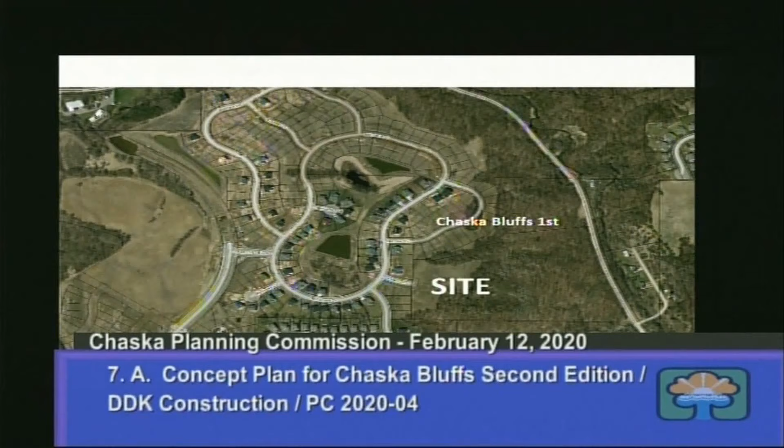So we have a concept plan application in front of you for Chaska Bluffs Second Edition that's located in Southwest Chaska. To give you an understanding of where the project site is located, I've included an aerial map exhibit here for reference. Again, it's in the Southwest Chaska area.

The main access into the site is going to be coming from our newest collector road in Southwest Chaska, known as Savannah Way. You'll take that northerly off of County Road 44, which is cut off on this aerial, up to basically the entrance of the Harvest development into the site. Deer Trail is a stub street right now, which provides access into the development we're looking at.

So to refresh your memory, DDK, who are the applicants and developer tonight, did their first edition just north of the site. They final platted that a couple years ago, and that was for detached villa lots off of Harrow Cove, which connects into the Harvest development as well. The southern site was basically put on hold until they could further evaluate stormwater needs out there.

So we are going through the start of our three-step process with the city, which starts with concept plan. This is the very first look at this addition and what's being proposed there. If all goes well tonight, they'll move on to their preliminary and final approvals.

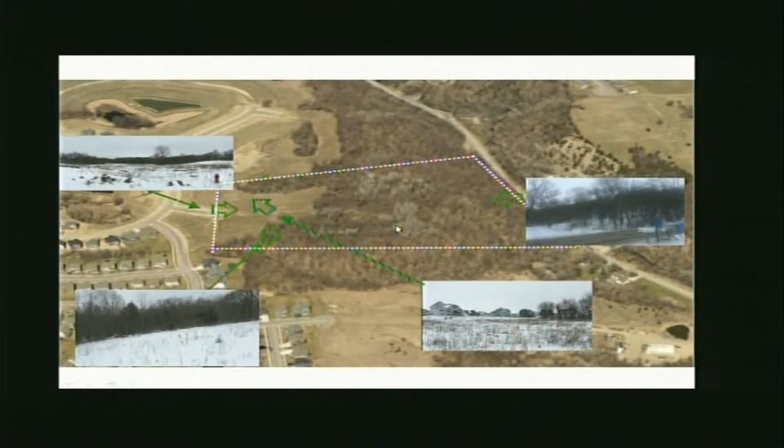So to give you a refresher on all the approvals that have subsequently taken place before where we're at now: it was in April of 2016 that the concept plan came in for a portion of the Harvest development, which also included the first edition of Chaska Bluffs off of Harrow Cove.

After that, it was evaluated that the area off of Deer Trail would be put on hold for concept plan approval until the stormwater work was further analyzed. Subsequent to that, in December of 2017, the preliminary plat and rezoning for Chaska Bluffs first was approved, and then in March of 2018, the final plat for Chaska Bluffs was approved. So they're currently building and constructing those detached villas out there right now on Harrow Cove.

So again, we're looking at a concept plan request tonight from DDK Construction to propose 17 single-family lots off of Deer Trail. The 17 lots extend off of Deer Trail, which stubs off today where you see on this aerial exhibit here. That will provide access to the 17 lots via a cul-de-sac.

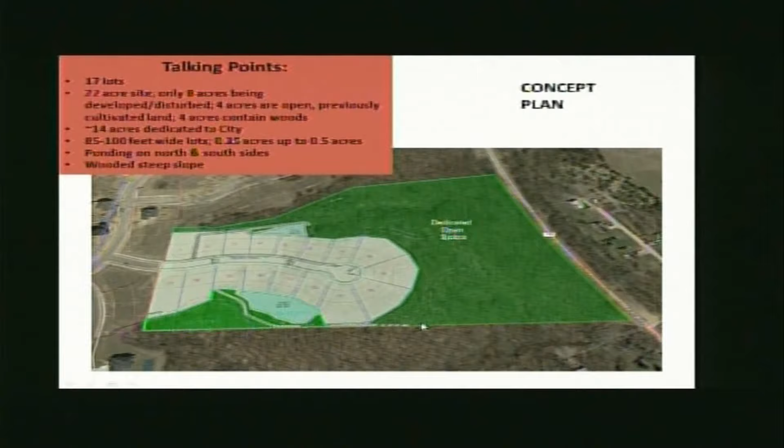So the plan that they landed on tonight was one of a few different iterations they've explored for the site. Back when they were originally looking at the site, they explored a 24-lot layout with 2 cul-de-sacs that extended much more into the wooded area and bluff area.

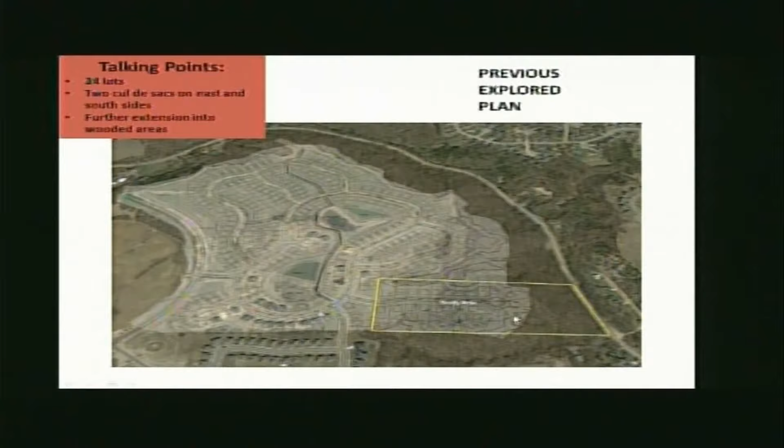In comparison, they landed on a more modest plan with only 17 lots. This exhibit shows the disturbance differences between the original plan and the one they're proposing tonight. They decided to go with the more modest plan so they could preserve more trees along the eastern and southern areas of the site, as well as provide adequate utilities for the lots being proposed.

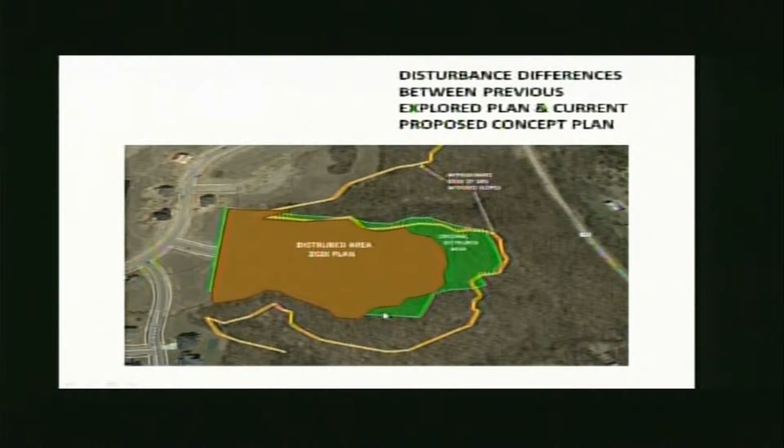Here's another iteration of the concept plan, a little bit simpler approach. The total distance of the road being provided into the site is 665 feet long. They will be proposing sidewalks on both sides of the street, which is standard for development.

One item of note that we provided in the report is where they are providing pond access to both stormwater ponds. We asked that this be evaluated further in terms of where the least invasive routes to these ponds can actually occur.

Specifically on the north side, it appears these access points are a lot longer than they need to be. So we looked at other options for where the pond access can occur while having the least invasive route into the site. We also noted that these access points should be on their own outlots or city-owned areas, not going through private lots or through side yards.

It becomes a little more difficult between the city and the private property owners in terms of the limitations implicated on those lots if they're through side yards. So we've asked that those be created into their own city-owned lots to basically mitigate any confusion or concerns that future residents and city crew members might have with that.

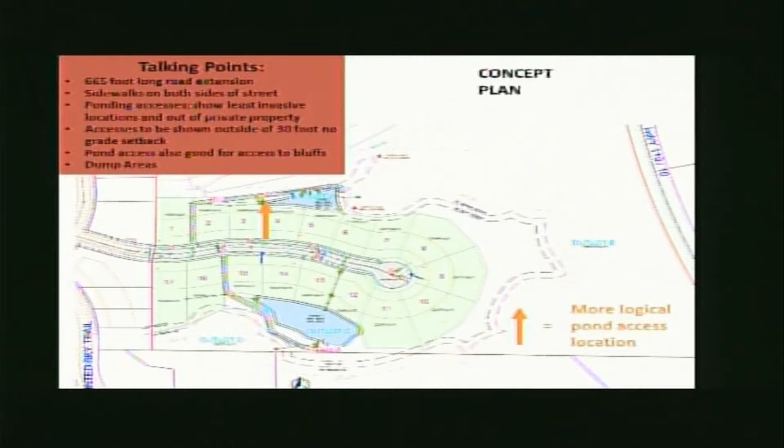So the other question I have, this probably pertains to our developer, because we paid a premium for a lot we were told would have no obstructed view. This is beautiful. Show me again where your house is, because I don't think they're putting a house behind yours.

There's no house, but there's someone's grass. They could put a shed, an RV, anything could go back there. Right now it's cedar trees and beautiful wild grass, it's a nice area.

What is being missed is behind his house right now, I live right up the block. You need to come up to the podium. Okay, so am I doing something wrong?

No, I just think part of what he's saying when he talks about an unobstructed view—please give us your name. Aaron Picard, I'm at 4201 Millstone Drive, I can show you where I am. Part of what he's saying is behind his house right now, where they're saying there will be a backyard, it's completely wooded.

And what you're saying right here is that's going to go away. See, this right here, that's where the neighbors are saying we're having a problem. See, this looks like it's—no, thank you.

I'm getting frustrated here because what this doesn't show is that all this around here is beautiful woods. It's birch trees, it's oaks, the trees that Liz pointed out, but we're all going to be looking at yards where we purchased lots expecting it to be wooded.

And there's a major grading problem too, because what this doesn't show—well, maybe it kind of shows—is that you need to see better pictures, because all of this goes in a somewhat steep grade. There's a heavy grade as you enter where this street's supposed to be. It's a steep hill, so how does that affect our drainage, our yards, everything else?

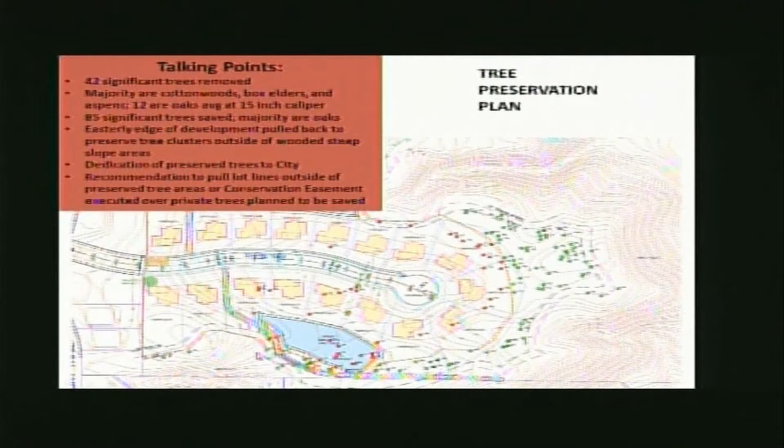I think Liz just said that on one of the plans before, there was another trail that wasn't shown. It was right in this bluff area I was talking about - between this undevelopable area, the area we don't own, and this, there's a trail down here. I'm not sure where it would lead or go, and I didn't include it on one of my slides. Maybe I can bring it up from here.

But it was the same question asked to Todd about whether that was going to happen, and it isn't. Well, the trail was access to the pond, right? That was the question that was asked. Yes, there was another one listed, another piece going down the shown bluff. So there won't be one that goes down there? No, no, no.

But I do have a question actually about that, since we're talking here. There's a sidewalk that goes up 44, and it stops right where the ravine begins, then it starts again around the Harvest area. Is there any connection planned there? There will be a connection. Yep. And that's all that really matters, then. That's fine, okay.

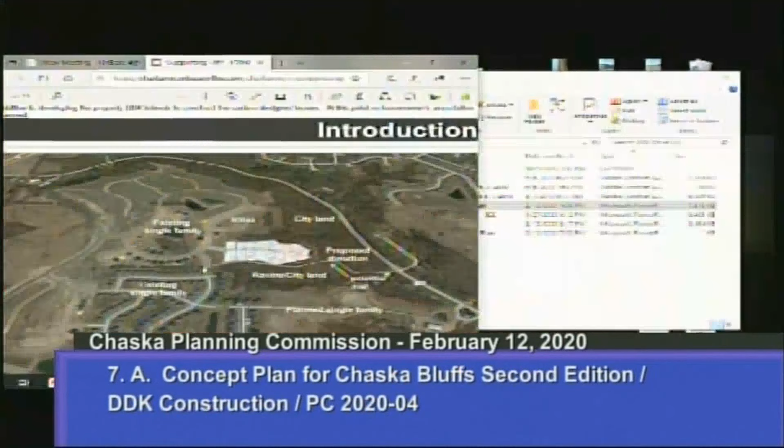All right. So I guess, Commissioner Bovee?

Yeah, I mean, I think you're saying I should wait to voice some of those grading concerns for the next one? No, I'm glad you're voicing them now, because they're heard, and the developer then needs to really listen and try to incorporate that into the next round. What I'm saying is this is not the final - there are many steps in a plan. This is step one, I would say.

So what is the developer's timeline on wanting to develop this? They'd like to start grading this year. So when would the next meeting be? Not an exact date, but it could happen as soon as April. We will also send out another notification about that meeting, and that's when we'll have more detailed plans, like the grading plan, elevations, and so forth - all of the technical engineering drawings at that time.

Okay, because I keep saying 'our' - I mean, we have other residents here that have some concerns. I don't want to take the podium forever, but maybe my issues are with Robert Thomas, not so much with the city. You can strike that from the record anytime you want, but...

We already have a dip in our yard because of the way the grading is, and we're kind of told that this is how it's gonna be. So I want to know - and I'm just saying it out there, we can discover it in April when the next meeting is - how is this going to affect our property, the one we're standing on? Because things done on one piece of land always affect another piece of land, regardless of whether there's a retention pond to retain water. Because we're up on a hill, I'm trying to figure out how that lot will be leveled so a house can be there. I don't know how that could actually work.

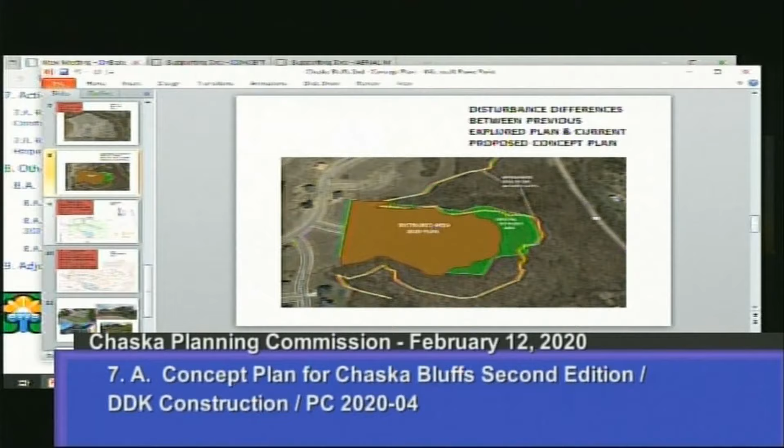The particular land that we were talking about - I'm going to go to that. So this parcel has always been, or it was part of the original plan when Traditions developed it - they dedicated that to the city. And we're dedicating then the property behind.

But this area in the Traditions plan - actually, your lot was originally planned to be a walkout. If you go back and look at the original plans, because that hill was all dropping significantly. Because we weren't ready to develop, Traditions went ahead and developed it without a walkout, so it's a... I don't know if it's a lookout. Lookout, full basement - that's a full basement. Okay, and so that changed the way our grading plan evolved also.

There will be some grading back here, but we're talking about minimal - a foot or two, that kind of grade. So what you see is a hill. Most of that hill is going to stay.

But the grading will start on that? Like where? I have a detailed plan, which I can give you. I still have it with me. So just give your name, and I'll get you the plan.

Because even though we're not seeking grading plan approval tonight, we've done it because we needed to figure out how to make the sewer work, to be honest.

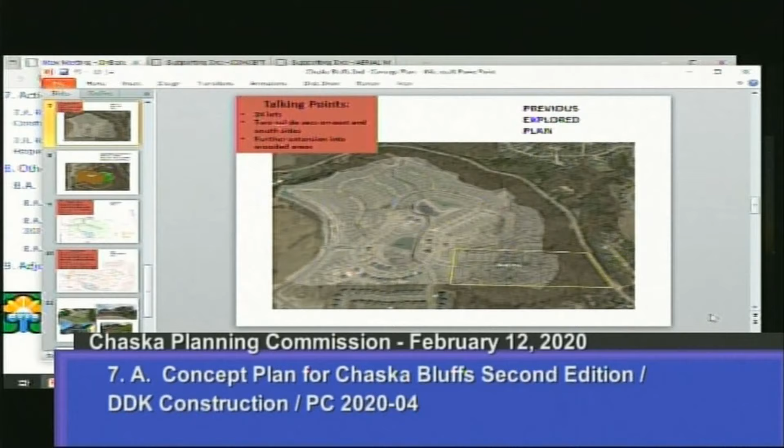You can even see one of the issues with that concept plan - there wasn't really a solution to stormwater. It doesn't show any ponds out there.

I wanted to clarify that because I think - and I forgot the gentleman's name who lives in the house there - it's important because it was available to see beforehand. Secondly, I actually think the new concept with fewer homes and getting rid of that cul-de-sac facing south actually helps free up their sight lines from the back of their homes. Before, you'd be looking right into some houses, but now at least those homes - and not just yours, but the one below and above, though that one's not a house - those sight lines will be partially preserved. So I do think that is better, but not to minimize his concern about the trees and the viewpoint. I do think it's nice for the commission to know.

To implement this concept plan, which again I want to restate was very conceptual, your lots would have been walkouts and the hill would have been dropped 15 to 20 feet. So whether that's better or worse, personally I'd rather have been on a walkout. But that's the big change that occurred, or will occur.

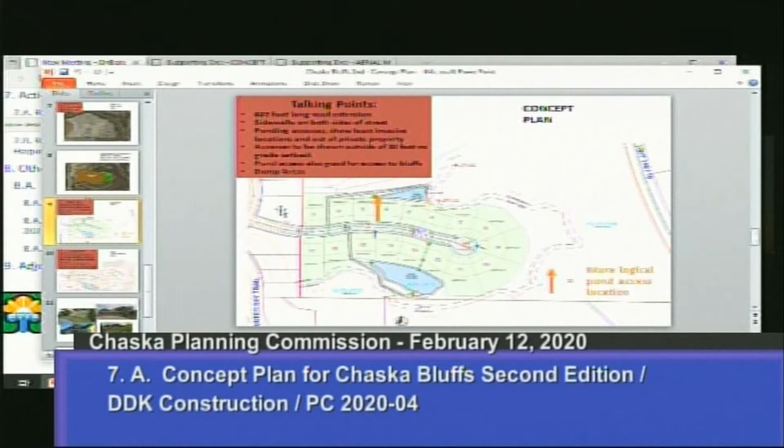I am sorry to have interrupted earlier. Again, I'm Erin Picard. I live at 4201 Millstone, and I'll just show you super quick - this is my lot, right here. I'm really happy to hear that the amount of trees originally planned have been reduced, but I still have concerns about how many trees are going to come out.

Liz, I'm sorry to ask - could you bring up that one picture that showed the actual tree line? It was an aerial that showed the tree line, it was in the thing behind it, I think. I'm sorry.

So their plan, which I realize you can't see right here, but I like that you can see the trees here, still shows taking out a lot of these trees.

I took pictures from my house today. I don't know if it's okay to show you, but I think it's different to see what we're talking about versus red and green dots on a map. We're talking trees that are 100 feet tall, and I can only imagine that took 50 years or more to grow.

I have concerns about taking down trees like that. I have concerns about the wildlife. There are a minimum of 3 coyotes, because I've seen them together, and I know there's more than that. There's a herd of deer, I've seen as many as 10 at a time, that live in these woods. The more we take out, the less habitat they have. In a day and age when we're talking about climate change and wildlife, I have significant concerns with how many trees and how much habitat we're taking away.

Now, I know I'm being hypocritical because my house took away some of that habitat, though my house didn't take away trees. So I understand some trees need to be cut down to make this usable property. But this is still a significant amount of land, habitat, wildlife, and trees that aren't going to come back anytime soon. So I am glad to hear it's better than it was, but I still think, in my opinion, it's too much, just from a habitat standpoint.

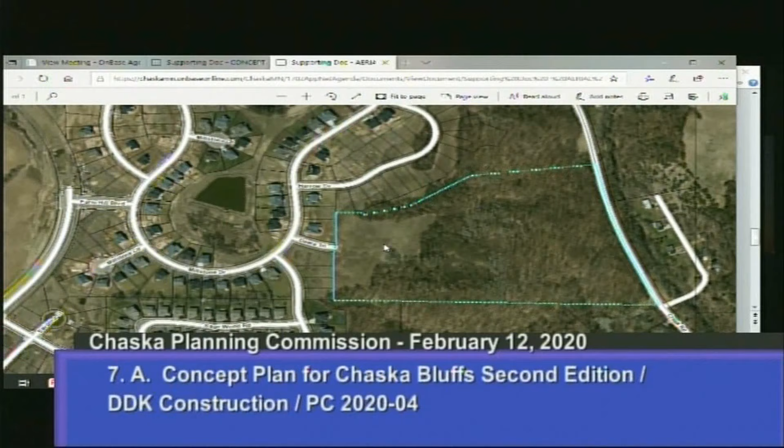So I'm concerned about how it's gonna drain. The city said you have to have one type of drainage system, now you can have this other one, but you're maxing the capacity. I'll elaborate - what we were talking about was a sewer. A lift station is because you have sewage above a certain grade, you can't use gravity. When you flush your toilet, it goes into pipes and follows gravity to the wastewater treatment facility, where a lift station needs to grind it and pump it up to a certain point to bring it back down. So it's different than stormwater.

We were talking about sewage, but when we're talking about potentially maxing things out, there's not concerns about putting too much in a pipe that can't take it. No, the city engineers identify pipes a certain size - there's neighborhoods much bigger than this. But I do want to go back to your point on the water on the land.

Not that I'm advocating for one party or the other, but when you develop a property you actually wind up having some of those problems go away, because they're forced to mitigate water issues and provide ponding and grading, and you get grass. So what once was not traversable usually becomes more habitable to walk on. Right now it's just a natural state, but they're forced to correct those issues with grading, storm sewer, and collector and drain. So you actually wind up having yards that kids can play in versus soil that's unsuitable. And yes, Chaska is clay - my house is on clay too.

Yep, no, I appreciate hearing that - things that I wouldn't know. So I just want to make sure I've stated my concern.

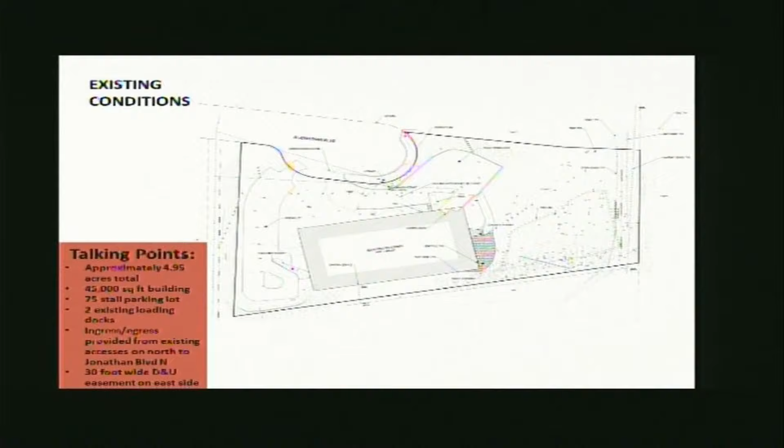They also have 2 existing loading docks on the front side or north side of the building, which they will be expanding. So there are 2 accesses onto North Jonathan Boulevard. The first one provides access to that western parking lot, and then just adjacent to that is another ingress and egress point to access the remainder of the parking lot in the loading dock area. Those accesses will remain in their current location even with this building addition. There is also a 30-foot wide drainage and utility easement on the eastern side, and they do plan to maintain that and not impact that as a part of this building addition. That's on the city line, right? Yes, it is.

So this is the site plan showing the building addition, so it's pretty much in line with the current building footprint. We're just extending it out a ways on the eastern side. Again, that's 26,750 square feet. You can also see the expansion a little bit to the loading dock area as well as the parking lot on the north and east sides of the building.

So with this building addition size, they are required to have 77 parking stalls based on the square footage and use that they're proposing there. However, they're only constructing 34 parking stalls as a part of this building addition, and the remainder they will show as proof of parking. So in the event that they need the additional parking on site, they have shown on a plan how it can work and be accessed, and do so when it's needed.

We don't want them to construct anything that's unneeded right now or unnecessary impervious pavement. So providing a proof of parking exhibit is more than adequate to show how they meet parking out there, which I'll show in the next slide.

The business owner has also commented that the parking, even right now, is sufficient for their building, and with the added parking, it will be sufficient to serve the building addition and employees they're adding. I believe they're only adding 2 additional employees even with this building expansion.

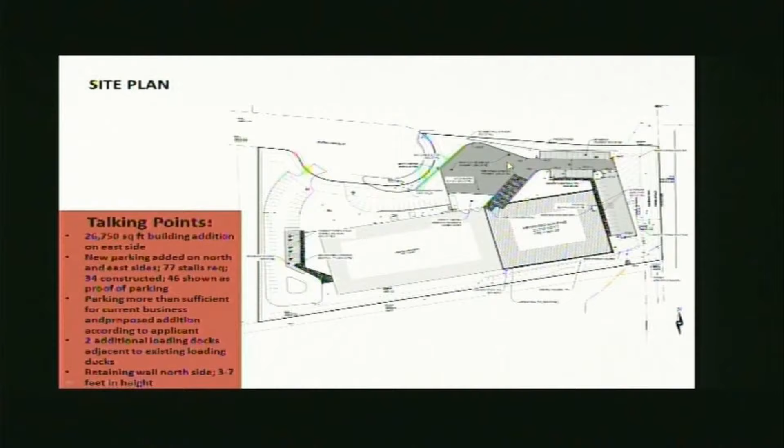And then lastly, due to the grade changes on the north side here, they do have to install a retaining wall with the expansion of the parking lot and loading dock area. And this ranges in height from 3 to 7 feet. That profile basically faces the building and not adjacent properties. They're also doing a level of landscaping around it too to kind of help break up the massing there.

So everything on the eastern side would be done if needed then? Right. Basically, kind of evening this off on the north and south sides is only in the event that they need it.

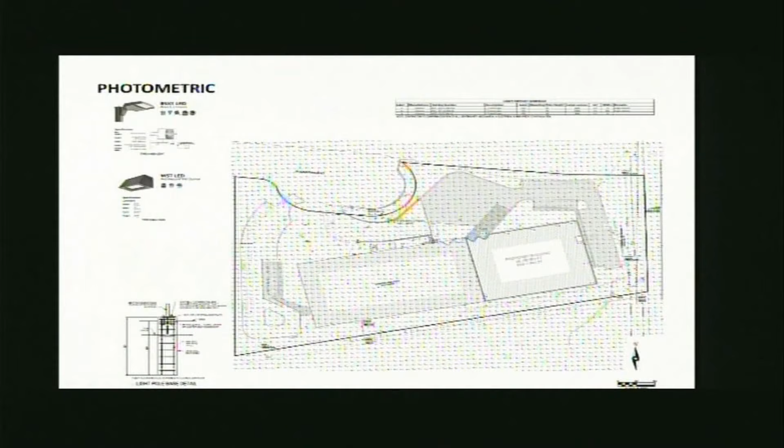Probably the only notable thing is the application of the precast panels they're using. The original building was made of precast panels with concrete stems, which was necessary back when they were building, as those stems were utilized for roof structural support. Now, 35 years later, we have more conventional systems to support those roof structures, so these concrete stems are obsolete and not needed.

So they're planning your typical precast concrete panels. It'll be a very similar color to the existing out there, so there should be a pretty seamless change, or not even much of a change, between the new and the old.

Just to note, back when they got 1985 approvals, we didn't have any building design and materials ordinance in play. So we don't typically apply that on a building addition, as it would create an imbalanced look for the building if we had them put in windows and brick on the newer side. So what we typically ask applicants to do is provide a more seamless approach to additions on existing buildings.

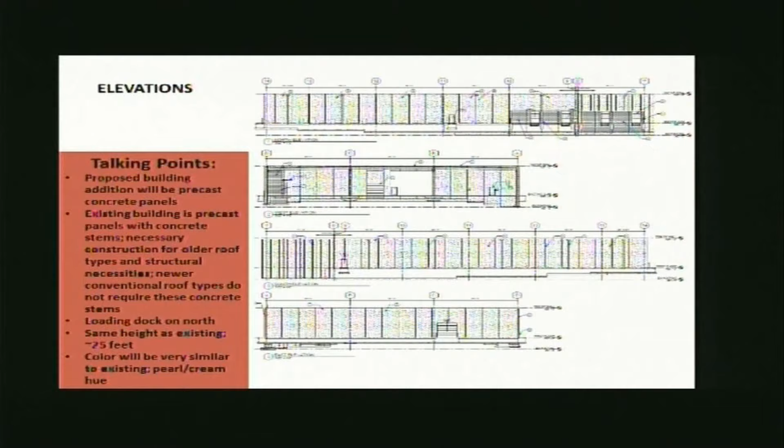I had a question. If you go back a slide or two that shows this - on the edge of the building they're expanding onto, is that wall a knockout wall that'll be supported with columns at that joint and then open? Or is there going to be a panel wall with cutouts for forklift access or man doors? Because the question is, surely they have to look at this, since the functionality of that first dock is zero if that wall is there.

Right, exactly. I'll have them come up and clarify. We'll do that, just curious. I'm almost done wrapping up here, so we'll have him come up and do that. Yeah, so the height will be maintained, color will be maintained, everything's going to fit in pretty well.

So we are asking you to make a motion to recommend approval of the preliminary site and building plan for QualiTech at 150 Jonathan Boulevard North, subject to the conditions listed in the staff report. I'll hand it over to the applicants now to answer any other questions you may have.

Yeah, I do have a question. Since that parking on the east side there - you said is only proof of parking as opposed to... Nope, everything that's shown here is what they're planning to install.

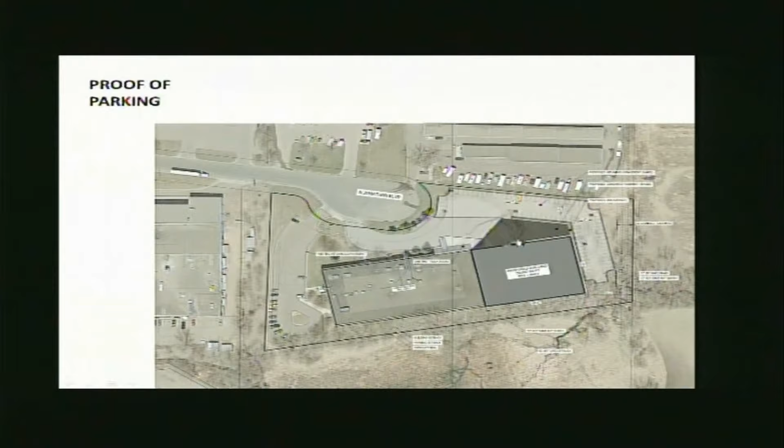What's the shadowing on that picture? I think that's basically where they're planning to restore some of the area to be sod. Okay, got it.

All right. Okay, I'll guess invite them up then. Thank you, Liz. And if the applicant wants to come up and answer any additional questions, we'd appreciate that.

First off, thank you so much for listening to us today and for proposing these questions and looking at this building expansion. My name is Whitney Stramer, I'm part of the civil engineering team with ISG, and I designed the site, so site-related design questions can go to me. I currently reside in Eden Prairie, Minnesota. And my name is Joe Wagner, I'm the project manager with ISG, working with the client QualiTech, and I can also answer any questions regarding the building and elevations. Thanks for your time.

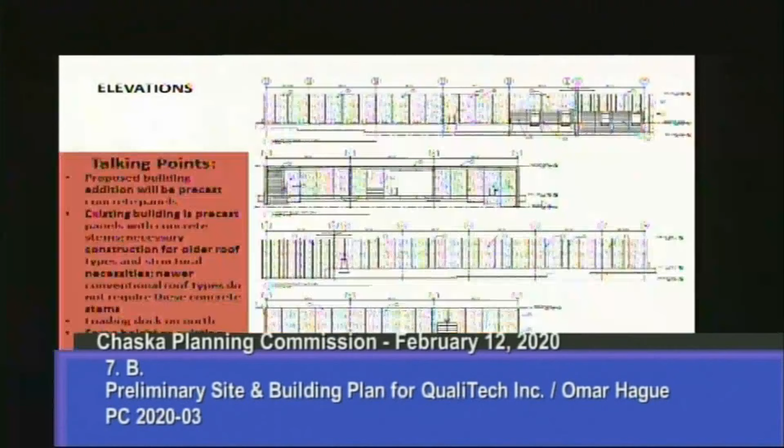I had that question with regards to the wall and functionality. Sure, let's go to the floor plan. So if I understand correctly, you're asking about this existing wall we're butting up to - our intent is to cut out the precast from the north wall down to where the processing labs start in this area, so that'll be opened up but butted into at the roof line, allowing QualiTech to bring forklifts through. And then there'll be another opening down here to get to the process rooms and for stacking of the product as well.

I'm curious about what the waste product of this building is and where that's handled, whether it's at the loading docks or another entrance or exit. The product comes in bulk on pallets, and also gets brought in containers if it's wet or a liquid. Those products are housed in the pallet area and brought into process rooms into hoppers, ovens, and mixing equipment to make the flavor packets that go out to their clients. So in general, there is no byproduct or waste.

After the product is made, they have to pressure wash the space, which are basically clean rooms, and then that water and remaining dust gets processed. There's a gray water system that cleans it before it goes into the city. Were you asking more about trash, like general trash?

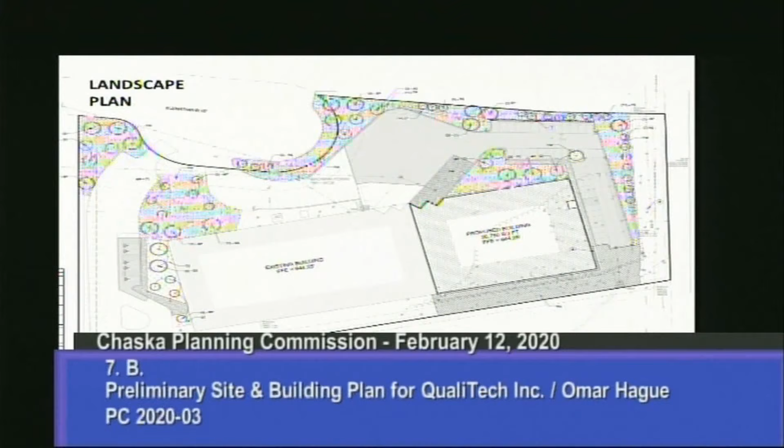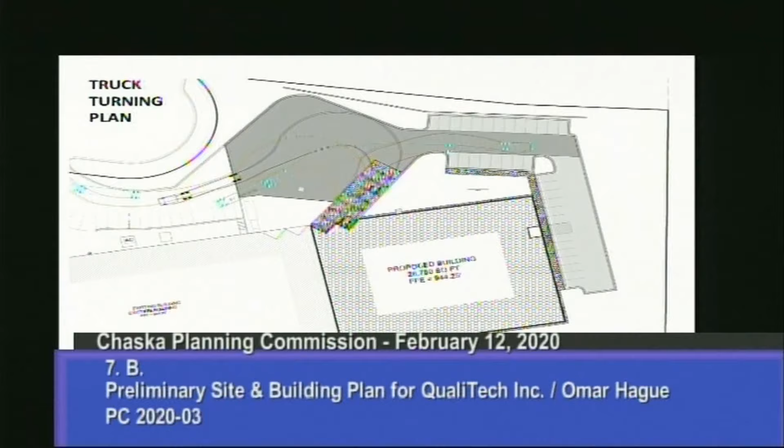That's great, perfect. Just an additional question with the loading dock area - I recognize it's existing and it's an odd place for it. Any concerns about trucks backing into where cars are going to be parked, into this space up on the north? So no, this design is showing the largest vehicle, a WB67 with the full bed. That's not always what they utilize, but it shows we widened that drive specifically. I don't have dimensions on this, it can be provided, but it is wider than your standard driving lane for that reason.

To accommodate a standard like 53-foot trailer turn. Yeah, I forgot the total length of the WB67, it's over 80 feet with that bed.

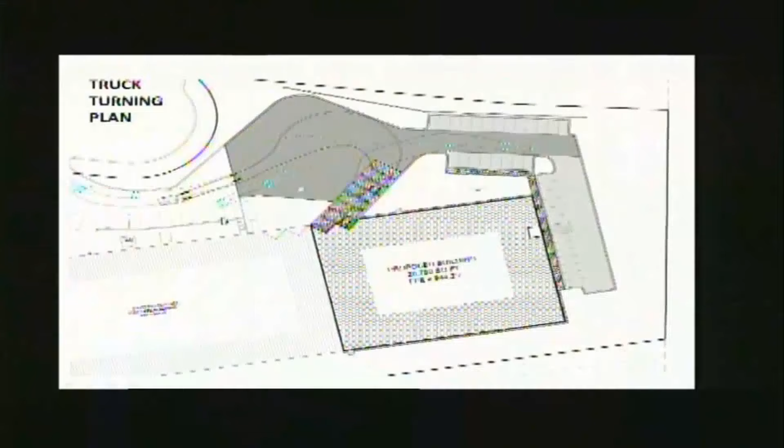Tractor and trailer, right? And I'll add that the additional parking spaces are being added due to the expansion requirements. All of the staff do utilize the other existing parking lot, not only because that's what we need from a capacity standpoint - it's a clean facility and we have a controlled entrance. So all employees will still have to utilize the main entrance to ensure they're flowing through the clean rooms before entering the manufacturing facility. So the parking lot along the expansion is not going to be utilized, but it's required per code. But per the truck evaluations, they've got more than enough space, even if it was utilized.

Okay, and there are two other points to be made with that. One, we will be updating all the ADA parking stalls to meet the required parking count. The secondary item is it was a little misleading at first - this area will be concrete pavement, and it looks larger just because this area wasn't surviving or thriving as well, so we're proposing further concrete pavement here, whereas currently it only goes up to this space. That's only to further improve and increase. Yeah, it's a little misleading, so people think trucks will park up to here, when in actuality when they're parked they're only to this area. Same thing with this back here.

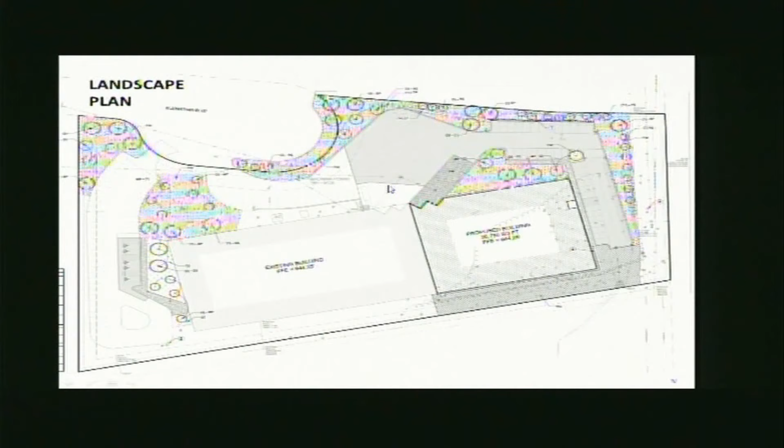Okay, thank you. One more - just curious, do you see adding more jobs then also? 2 more people? Okay. Yeah, one of the driving forces for the expansion is that within the current space, we are at capacity with our existing customer base. With new technology within the food flavor products, we have an opportunity to continue to increase and grow the business. With current capacity, we're looking at adding 2 to 5 when we first move into the building, but we're to the point where if we don't expand, there's no opportunity for growth. So this is going to allow us to continue to grow.

We've planned for 10 years, so we have a tremendous amount of opportunity to continue to grow the business. The immediate need is 2 to 5 to accommodate some increase in production. We're also currently renting warehouse space in Shakopee, so this will allow us to consolidate that warehouse into this facility. But we're very excited and hopeful to continue to grow. That's a big headache out of the way. It is, absolutely.

All right, anyone else? I'm just happy that someone's happy in Chaska and wants to enlarge in Chaska, and we can make it work. And you went over and above on the landscape plan - I like it, nicely done. That's a good Chaska company. Okay, all right, doesn't sound like we have any more questions, so thank you very much, I appreciate it.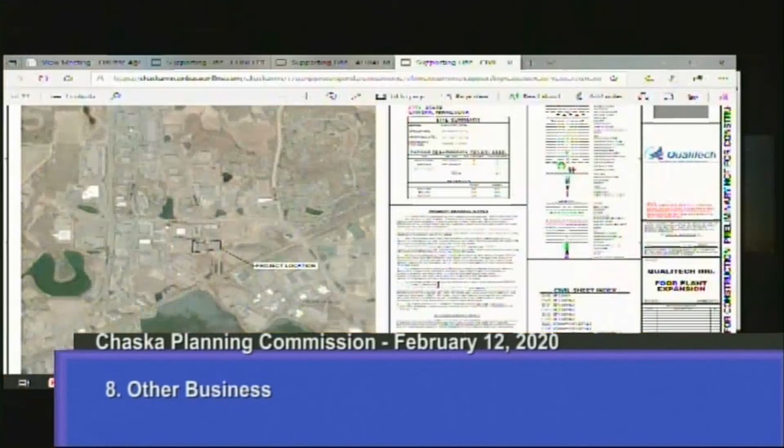I couldn't help but notice the water. Most of that Jonathan industrial area was built before we had rules. And it's so very obvious with the shadows in the pond, in Lake Hazeltine I believe, that things are falling into it. A lot of stuff is falling into it from our plumes, I think is the right word for this stuff. And to retrofit it for our stormwater control ponds cannot really occur.

And so that's why I was very glad to hear about the stormwater that the company was going to do. I'm hoping all our brand-new members really remember this, so when we come up with stormwater ponds in our development, we insist that they're made large enough to handle what comes off of the parking lots.

When I look at this, I'm thinking on the south side you don't see it - that's housing as a whole. On the north side it's parking lots and business and so forth. Maybe the city can ask - right now it would probably just be an ask - if our industrial people would at least sweep their parking lots in the spring and get the sand and any residue salt off and saved for next year, because this lake probably is dying just because of the junk going into it.

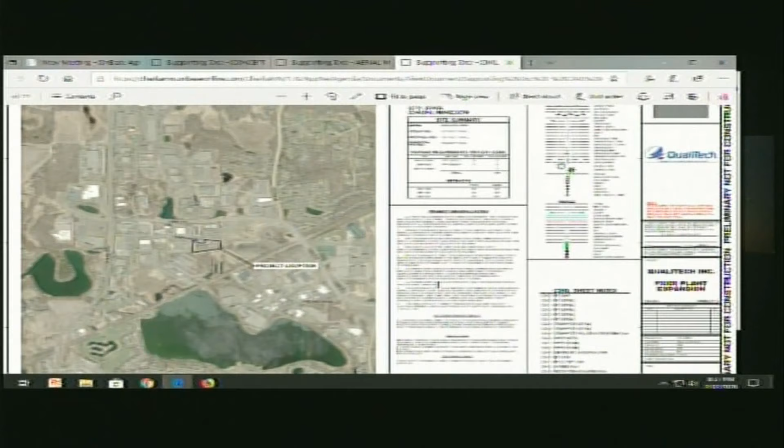If you look at just Apple Maps and zoom out to look at Lake Hazeltine compared to Lake Ann, Lake Susan, Lake Lucy - Hazeltine is solid green on this map, and Lake Ann and Lake Lucy look like normal water. You can see what you're saying, you can definitely see it right on an aerial, at this time of year or whenever it was, it came out just perfect.

And we have to start paying attention. As I say, we probably can't retrofit, but we can ask. What do you think causes it - is that an algae bloom situation with too much nitrogen and stuff like that? Oh, it could be anything - could be sand, could be salt.

The golf course uses a lot of fertilizer and Hazeltine's right there too. That's interesting because businesses are on the other side of the lake too. In Bavaria, right in my neighborhood, the town course is cleaner, but it doesn't butt up to the lake - there's a little wood border. Hazeltine does, and it also doesn't have industrial around it. So I'm just saying this because we've got new members, and here is a perfect example of what would have been nice to be doing back in the 70s and 80s, but we're not.

But I'm very glad - that's why I asked about what those stormwater things were underground at QualiTech. And that's my comment, thank you.